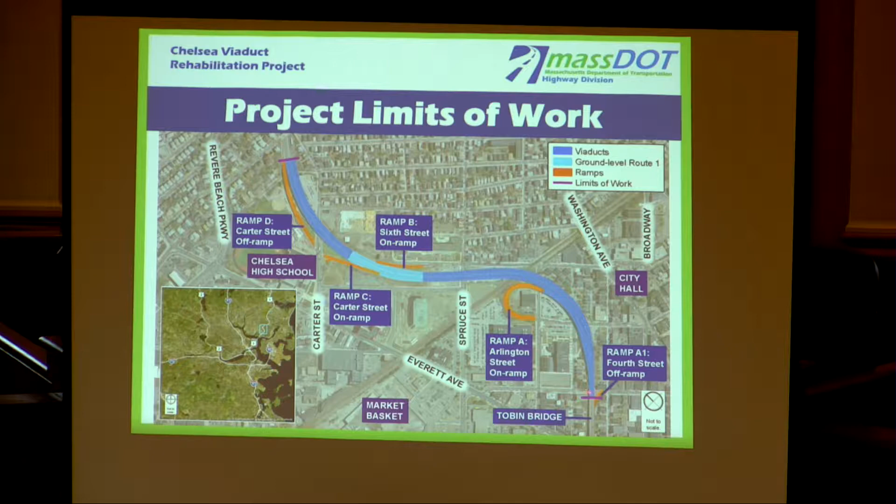Project limits of work include the entire structure, the Chelsea Viaduct, on Route 1. The northern limit of work is right north of Chelsea High School, and then continues southbound all the way to where the viaduct transitions over to the Tobin Bridge, right at this location. And just a bird's eye view to better orient yourself of the project area, including the ramps, Arlington Street on-ramp, Carter Street on-ramp, 6th Street on-ramp.

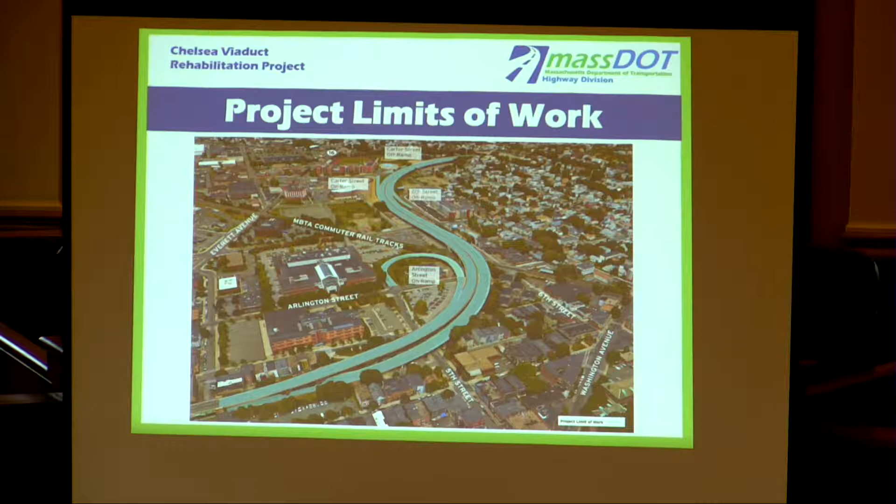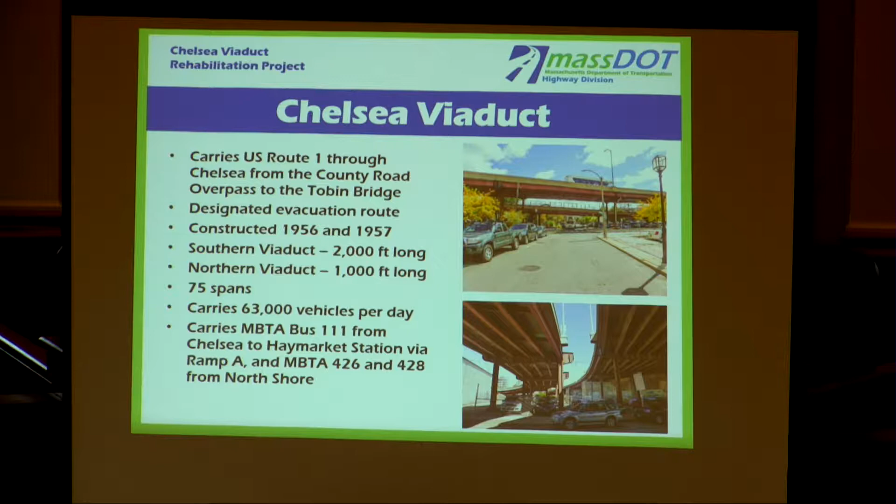So the Chelsea Viaduct, as most of you know, carries Route 1 through the city of Chelsea, carries about 63,000 vehicles a day. It was constructed in the late 1950s. It is a major regional component to the transportation system here, north of Boston, leading in and out of the city. It also carries a variety of transit routes, MBTA Bus Route 111 and a few other options, Bus Route 111 being the primary service from Chelsea into Boston for commuters, or for transit riders.

Existing conditions, for those of you who have been underneath the viaduct, you understand the deterioration that is occurring. The structure itself is structurally deficient. Both the deck and the structure are in poor to severe condition. I want to reiterate that this does not mean that it is not safe to drive on the viaduct. It is indeed safe. It's not going to fall down, but it is in pretty rough shape and is in need of some serious repairs.

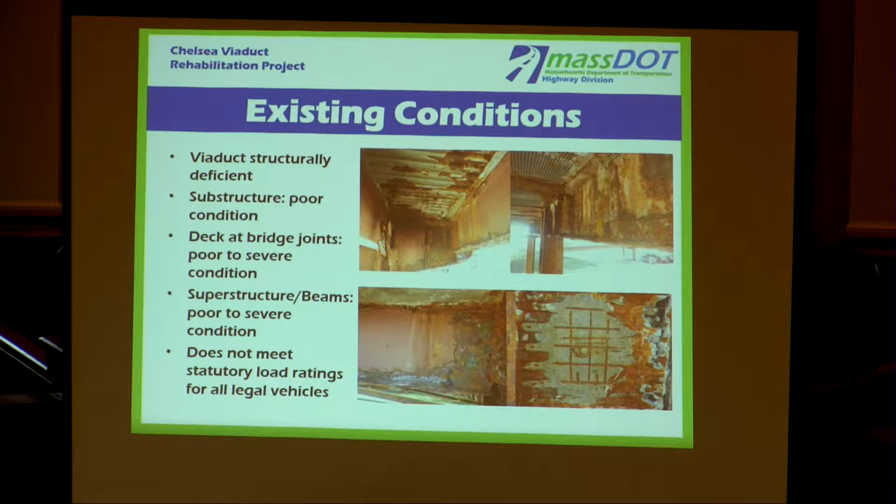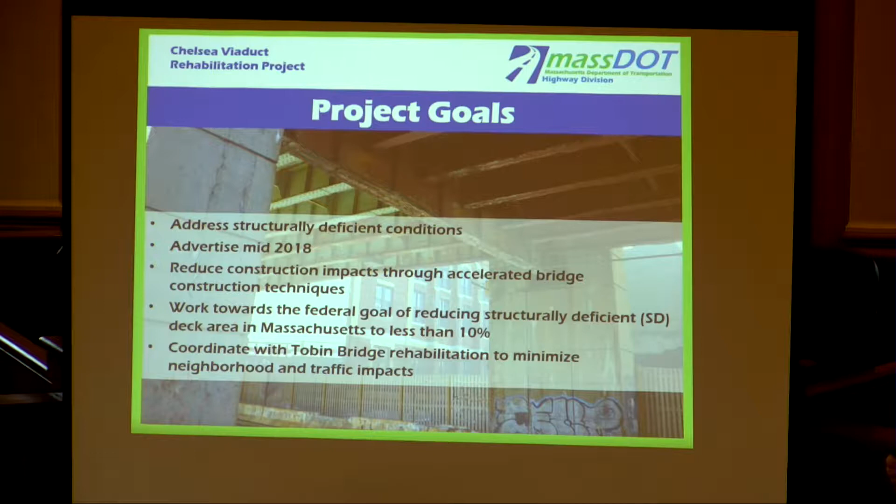So the goals of the project: number one, correcting those substandard conditions. We want to advertise the project in 2018 to align the construction of this project with the construction that's going to be happening on the rehabilitation project on the Tobin Bridge. And then another large goal of the project is to reduce impacts to abutters to the maximum extent possible. We understand that this is going to be quite the burden on the community, and we want to reduce and lessen those impacts to the most that we can.

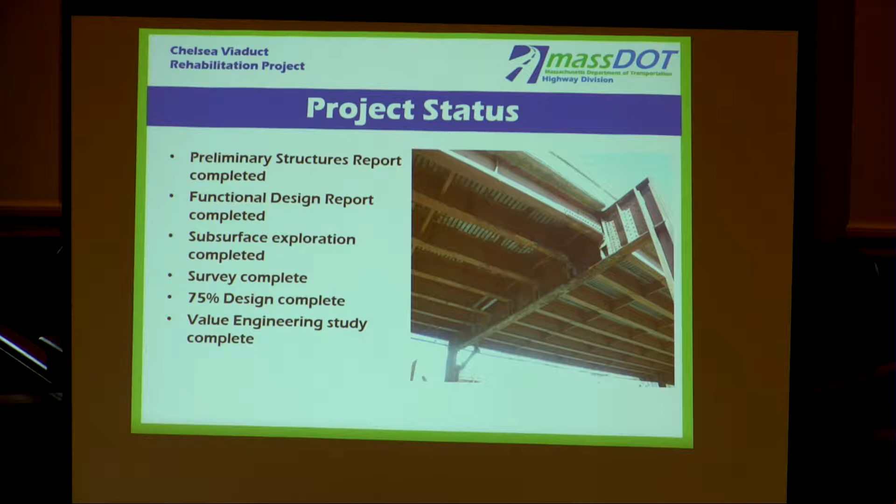Project status, this is where we are today. The important thing on this is that we are right now 75% design has been complete. In the coming months, we're going to be advancing towards final design. That by no means is saying that the project is not receptive to hearing the community concerns and that there isn't an opportunity for concerns to be incorporated into the design moving forward.

So again, at 75% design, which was completed just this month, final design is right now scheduled to be occurring or completed in May next month, with the goal of advertising the project in June.

The scope of work first and foremost includes rehabilitating and repairing the existing superstructure and substructure, utilizing prefabricated bridge units, or PBUs as we refer to them. PBUs are an accelerated bridge construction methodology - we'll get into more detail on that later. We also plan on installing crash barriers, a solid snow fence where possible, where it doesn't impede sight distance on the viaduct. We're going to replace roadway lighting, bridge drainage, and rehabilitate the existing parking lots beneath the structure.

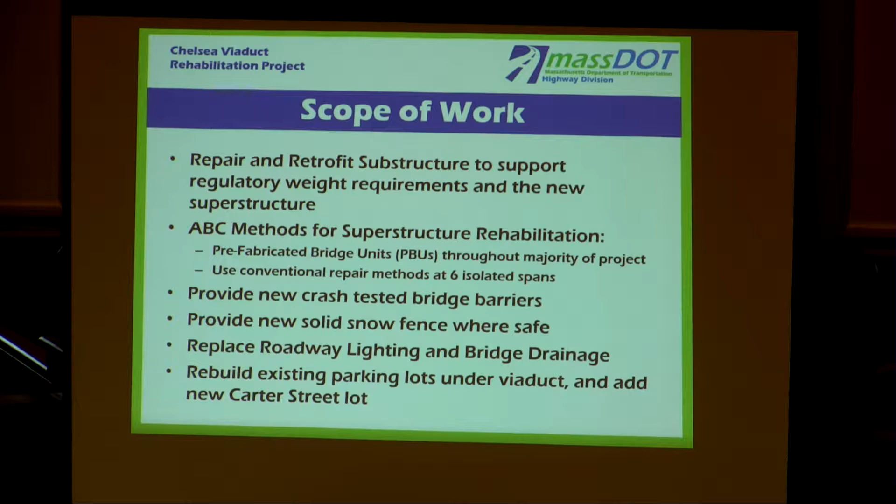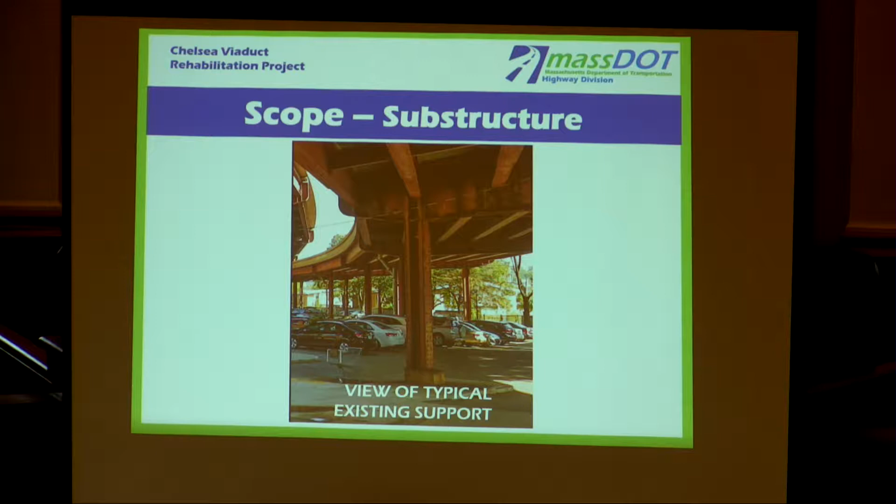So as part of the project, we have a series of options which we are engaging with the public to enhance beneath the structure, to try to give it a little bit more of a community feel to the maximum extent that you could do underneath a structure such as this.

So the design team have developed a few potential alternatives for what can be done to the supporting elements, the beams in place. If we go back and look at the picture I showed before, really not very nice to look at. We have a few options here: this standard column concrete encasement, or we're exploring other alternatives that could include the possibility of artist displays. This could be done on a rotation - we could work with the city, engage with the high school community groups to have a rotating art display beneath the viaduct.

Here's a few other options we're working with. These options are on display in a few locations, both here in City Hall as well as the library throughout the community, and we are seeking the input of the community to determine what's the most favorable of these options. This one right here, which would allow itself to be painted and repainted in an artist rotation, is the current leader. These are also on display downstairs. Then we have these two other options - you can see in this one, this offers an opportunity for an interchangeable art display that could be up there for a given amount of time and then switched out with other art displays.

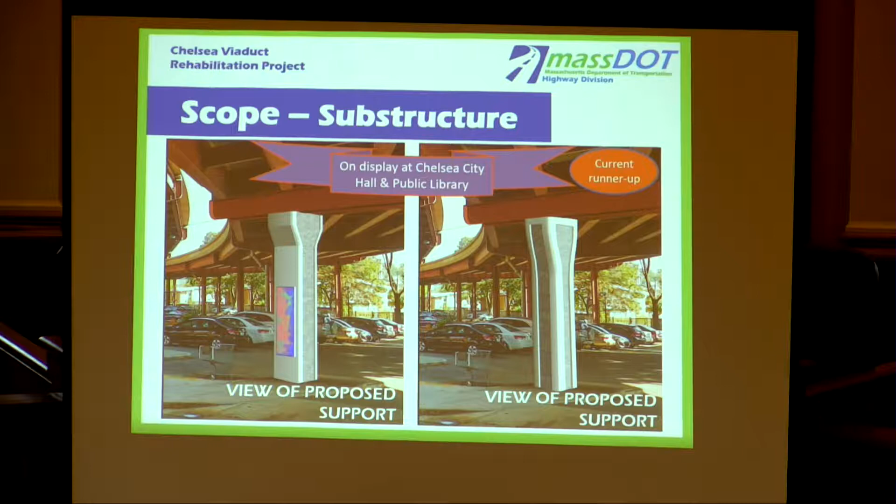The scope of the superstructure - again, the entire superstructure will be replaced. We intend to utilize these prefabricated bridge units, again an accelerated bridge construction method. These bridge units are produced off-site, then shipped in and laid down in a series, and the project would kind of caterpillar along. This allows for a shorter duration in one location and allows the project to be done in a much faster duration as opposed to a traditional construction method.

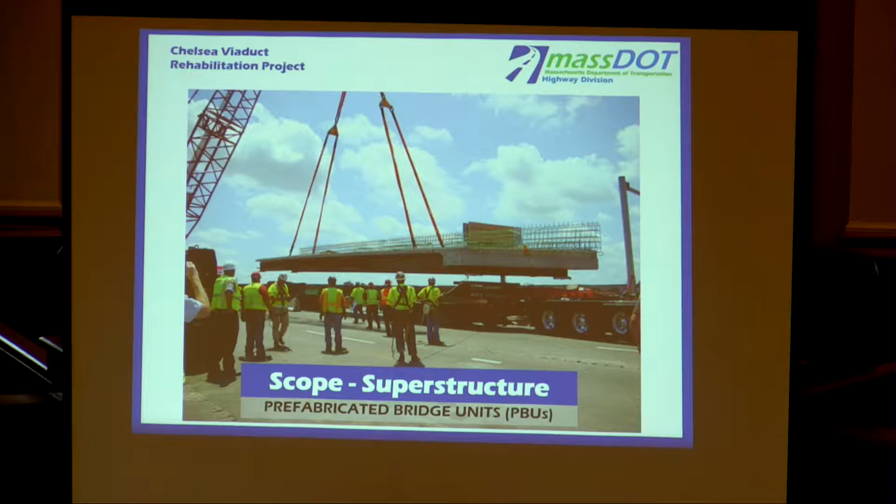This is a photo from one of the bridges that was done during MassDOT's Fast 14 project, which was acclaimed for its efficiency.

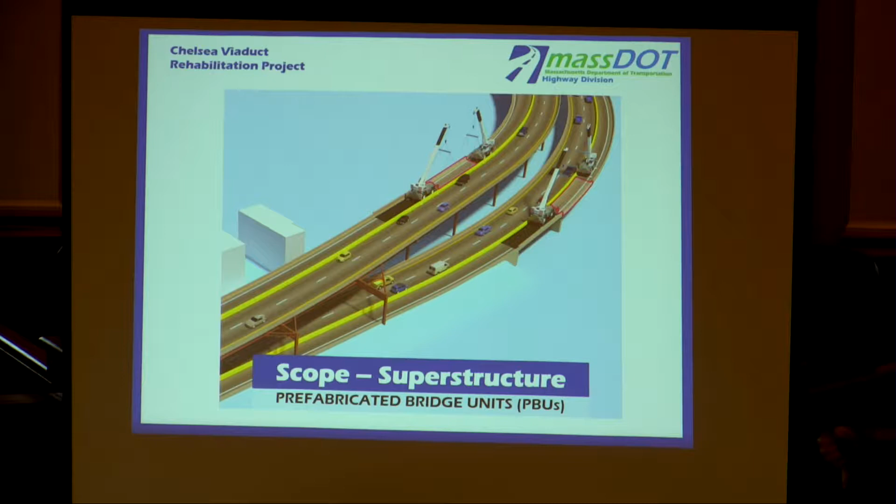There are spans within the viaduct where those PBUs cannot be utilized, due to varying constraints. The two locations where the PBUs, or the ABC accelerated bridge methods, will not be able to be utilized are right at the southern limit of the project, and then up where the viaduct crosses over the Silver Line or the commuter rail. At these locations it is going to be conventional repair, which will be longer in duration. We'll get into more about how we're going to schedule that to reduce the impacts to abutters.

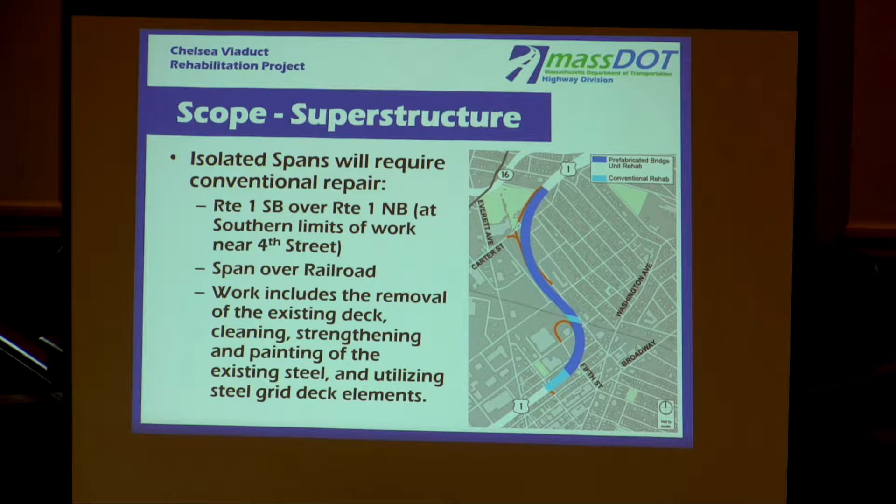The construction schedule: post-advertising in June of '18, notice to proceed will then be given to the contractor in the fall. Work on the substructure will begin in 2019, going out through the entire duration of 2019. The work on the superstructure, the PBUs I was just talking about, will begin in spring of 2020 and continue throughout 2020, with the final restoration on the viaduct being completed in 2021.

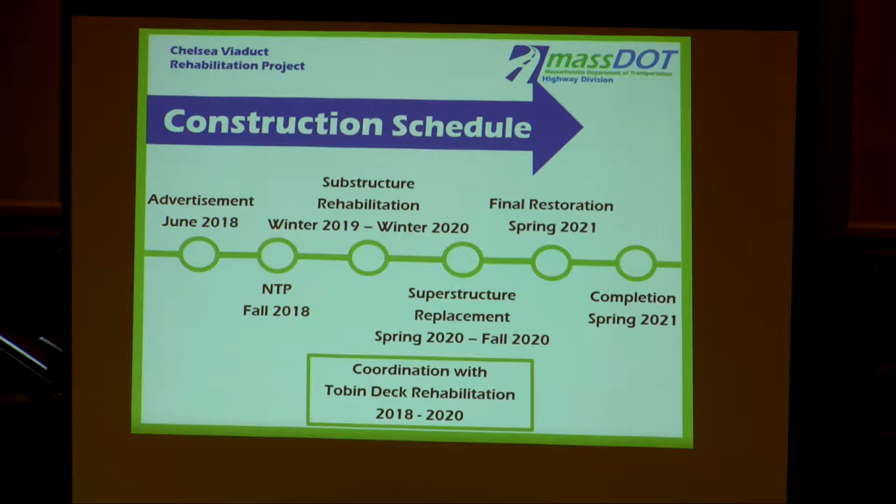During the impacts to traffic throughout the project, because it's split into two phases, the substructure work and the superstructure work, we've analyzed impacts to traffic based upon those phases. The substructure work will have no impacts to traffic on Route 1, and there will be no lane closures during that work. That's occurring in 2019.

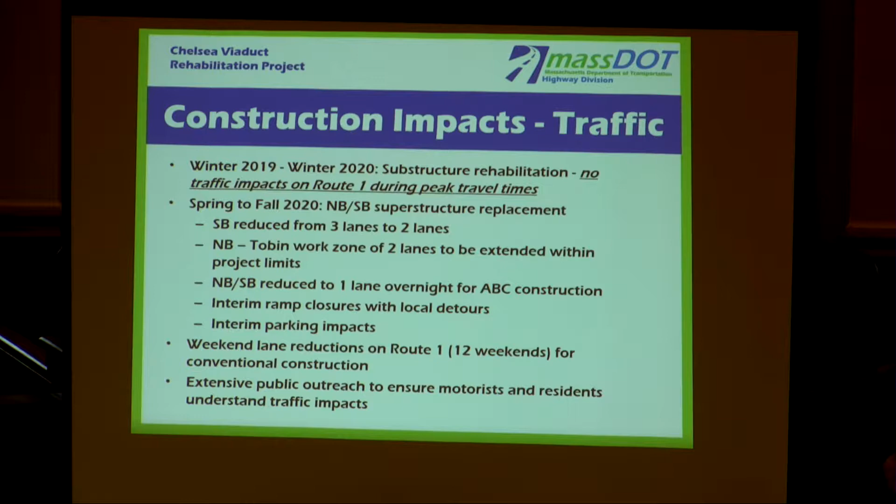We'll see the bulk, or really all, of the impacts to regional traffic resulting from the superstructure work. During that time, southbound Route 1 will be reduced from 3 lanes to 2, and northbound will also be reduced from 3 to 2, coinciding with the Tobin Bridge rehabilitation project. The Tobin Bridge rehab will also reduce northbound from 3 lanes to 2, aligning with the viaduct work so conditions match, creating a seamless transition from the Tobin Bridge project onto the viaduct project.

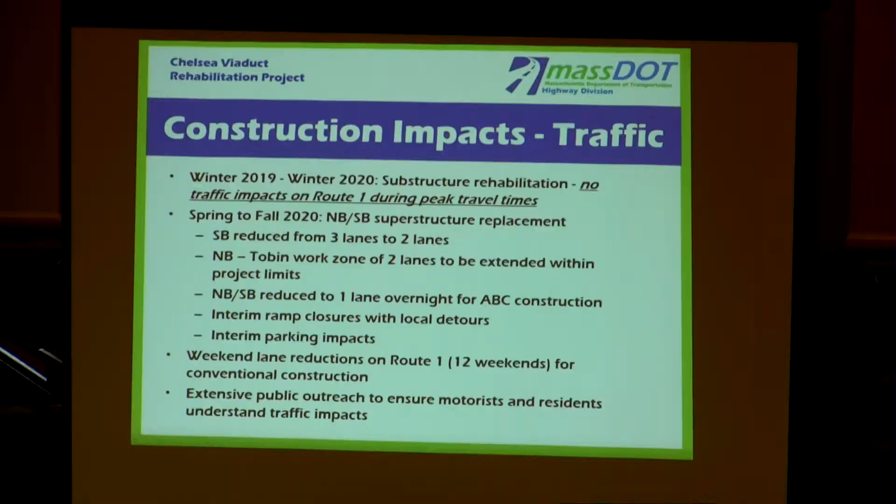To dive a bit deeper into what's happening at those spans where PBUs couldn't be used and traditional construction methods had to be applied, in order to limit impacts to abutters at these locations, MassDOT is proposing a 12-weekend significant lane reduction on the viaduct. During these 12 weekends, the viaduct Route 1 will be limited to 1 lane in each direction, and the contractor will be afforded 55-hour work windows from Friday until early Monday morning.

The intent is that the construction, which would have fairly substantial noise impacts with hours of operation going through the evening, would have that impact limited in duration. As opposed to if the 12-weekend shutdown wasn't used, the contractor would spend approximately 9 months at each location. So the idea is for regional traffic and the community to take the brunt of those impacts all at once, rather than drawn out over 9 months.

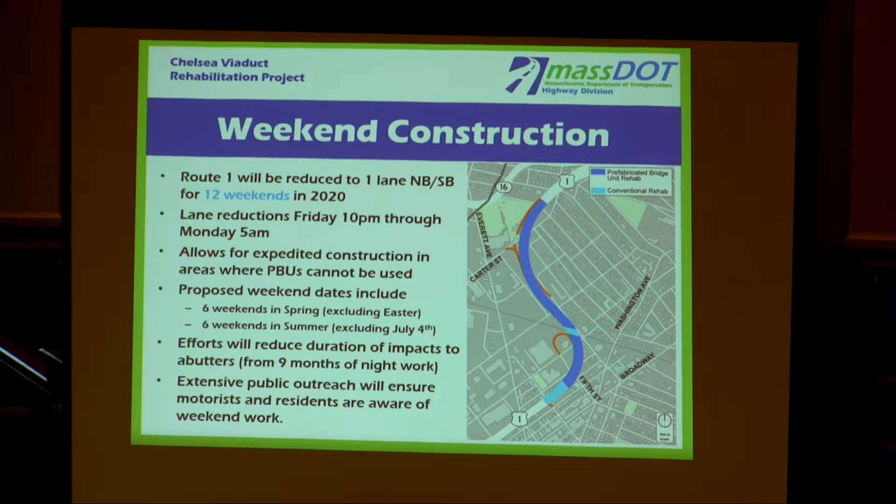For regional traffic mitigation, the contractor will be working with a public outreach specialist. There will be a robust program to make commuters, both regionally and locally, aware of the construction schedule and the plan, when people will be working and when lanes will be shut down. There will also be a police detail program in place. We've identified key locations, which I'll show on a map in a moment, where we feel details are going to be required to mitigate local traffic impacts.

There will be advanced warning signs letting commuters know when to expect impacts, both regionally and locally. Signals at intersections will be retimed and coordinated with one another.

The intent of the traffic mitigation plan is that it's not one and done. This plan isn't just put in place during the design phase, but throughout implementation—week 1, week 2, week 3—we'll be out in the community seeing what's happening locally. If a detail needs to be repositioned to help mitigate local impacts on local roads, that's an option available to us. To reiterate, we're not taking our eye off the ball; we'll continue to be here, take a first-hand account, and react appropriately to ensure the most is being done as that first wave of impacts is felt.

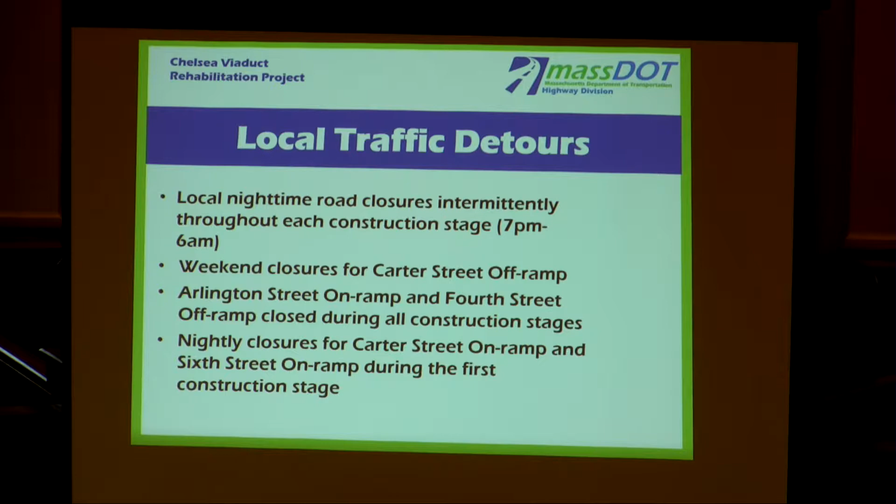So we anticipate impacts to the abutters. I've said this before in front of a few different groups. It's not possible to avoid all impacts to abutters. We're talking about a heavy construction operation. It will be loud, there will be dust. However, there will be mitigation plans created prior to construction in an effort to abate the impacts to the maximum extent.

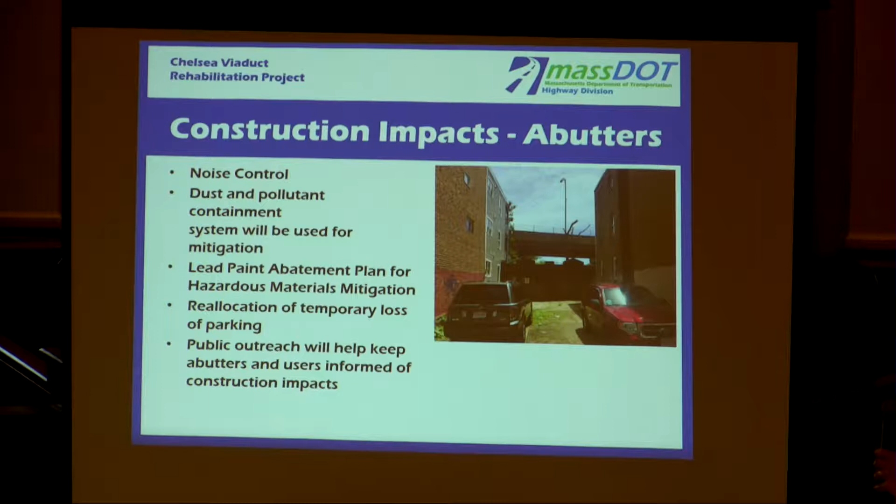So for noise, the viaduct, especially in a few key locations, is located approximately 35 to 40 feet from residences, very close, within a very close proximity. At a selected number of locations, MassDOT has gone out and measured ambient noise levels during normal periods of day, both during the day and at night.

The contractor will be required to work with an acoustical engineer to take those measurements and then develop a noise abatement plan. The contractor will be directed of allowable noise levels, and in the event that those noise levels are expected to be exceeded, they will have to put up temporary mitigation measures in place to ensure that residents do not experience the full brunt of those exceeded noise levels.

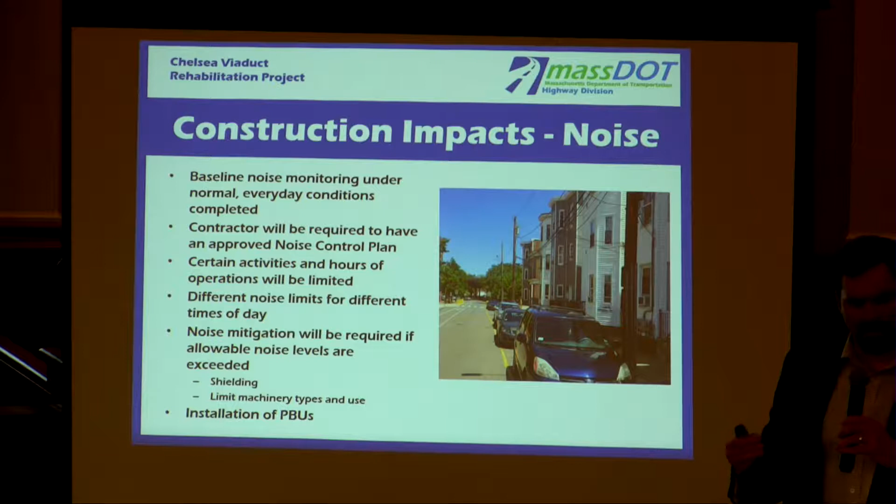That mitigation could look like temporary noise barriers. There can be noise reduction, noise lessening technologies and applications that can be put on construction equipment to keep those noise levels below the allowable amount.

There's going to be a loss of parking temporarily beneath the viaduct. The reason for that is that the contractor needs to access the substructure to get beneath. So there will be temporary parking loss. However, there will be the construction of a new parking lot adjacent to the high school on Carter Street, which will be accessible to whichever parking lot is being affected temporarily, and then whoever would be the users of that parking lot will be able to access that Carter Street parking lot.

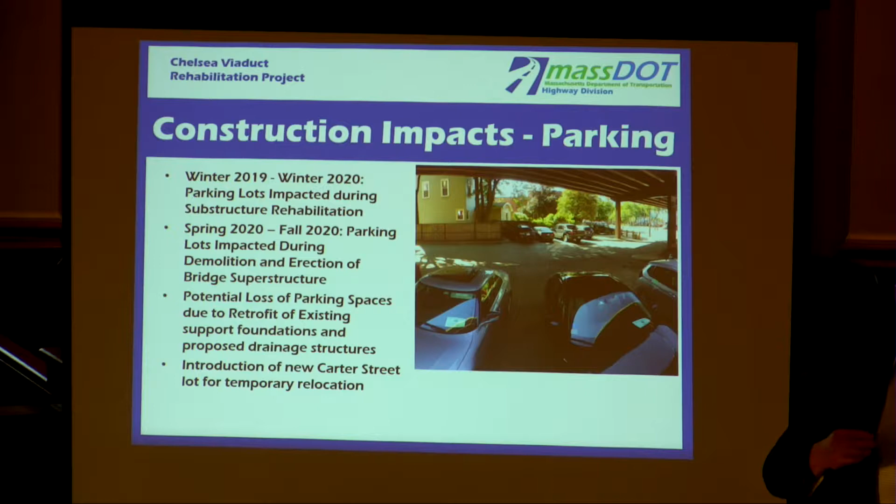There will be a strict lead and dust control plan put on the contractor. The contractor will be required to comply with national or federal, state, and local regulations regarding lead control. There will be a dust control plan in place. During construction and demolition operations, all activities will be required to be sprayed down with water to limit dust, and this will all be monitored by an environmental monitor on site.

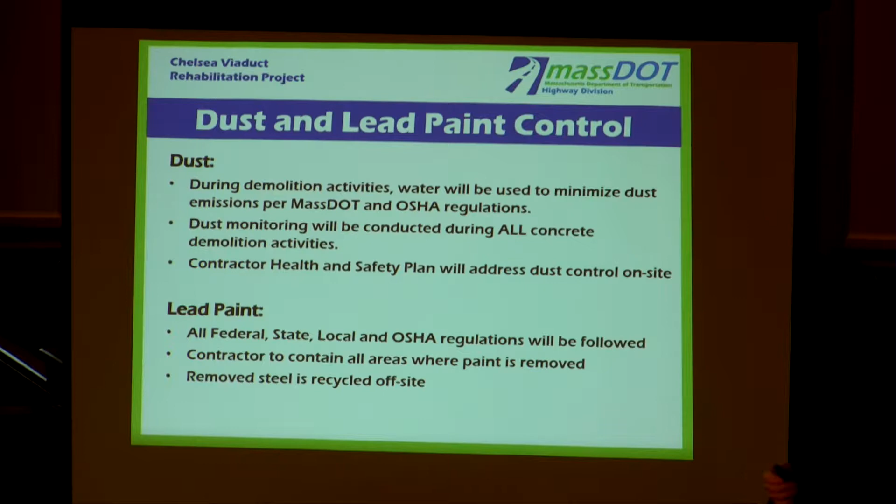And in the event that those allowable conditions are exceeded, the environmental monitor will be given the authority to halt the operation until the impacts are mitigated for before being allowed to continue.

This project is federally funded and does require review and approval under the National Environmental Policy Act. MassDOT is coordinating with the Federal Highway Administration throughout this process and will continue to engage throughout the environmental review.

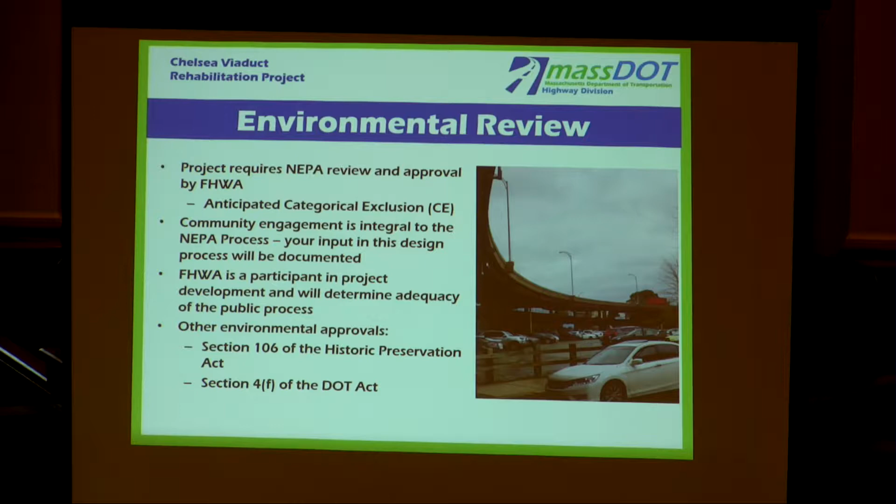The public participation plan has been in place for quite some time now. Many of you have seen us before. You'll continue to see us. We have taken a very serious approach to engaging with the community and trying to connect with all residents, all stakeholders, so there are no surprises, and again, to hear your concerns and incorporate them into the design where possible.

Before the design public hearing, some of the mitigation measures that MassDOT had already agreed to included providing an allowance for additional crossing guards near schools within the project area, architectural improvements to the supporting elements beneath the structure, weekend construction to lessen those impacts and shorten the duration so we could be in and out as quickly as possible, and improving the lighting underneath the structure.

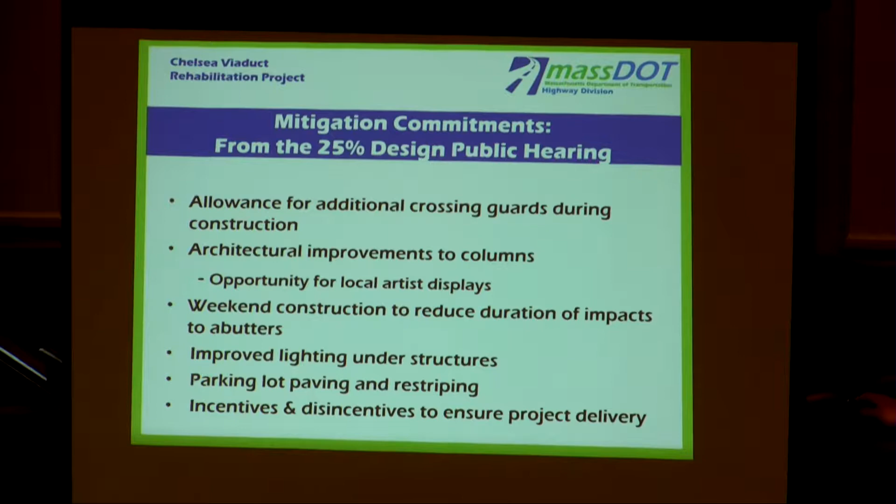All parking lots beneath the viaduct will be rehabilitated, resurfaced, and restriped, and there will be strict incentives and disincentives in the contract, which rewards the contractor financially if they are able to finish a given portion of the project ahead of schedule. If they exceed what has been scheduled, then they are disincentivized and need to pay a penalty. So these were all elements of the mitigation package that was in place prior to the last time we were here.

We heard overwhelmingly through the design public hearing, through our meetings with Chelsea GreenRoots, City Council, Chelsea Collaborative, one-on-ones, and the business community, that there was strong opposition to the closure of Ramp A, the 5th Street on-ramp. The project had originally included the demolition of this ramp due to a low number in traffic volumes.

Based on the feedback we heard, overwhelmingly, the decision was made to keep Ramp A in the project. This ramp will stay open. The ramp is going to be rehabilitated. There will be no shift in geometry, and the ramp will be closed during construction and will open after construction. The ramp will stay in place.

We also heard, last time we were here, quite strikingly, stories about the impact of snow removal along the viaduct and the damage that snow falling off of the viaduct does to abutting properties, broken windows. We took that very seriously, and tried to determine the most appropriate measures we could take to stop that from happening. The project always included the installation of a new snow barrier. The traditional snow barrier that MassDOT installs tends to be slotted, allowing material to get through. However, due to the proximity of these properties to the viaduct, any material getting through was having a direct impact on the residences.

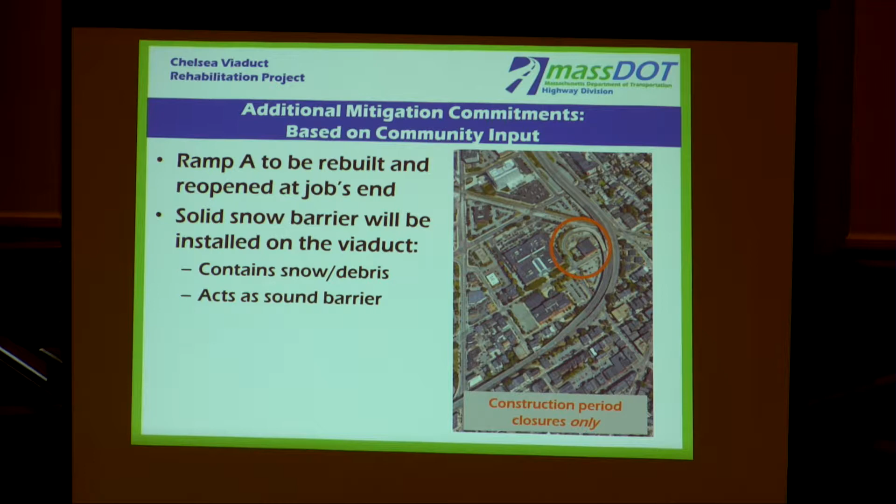We also heard a concern about the levels of noise as a result of traffic that direct abutters experience, during the day and at night. The project does not qualify as a Type 1 project, therefore it does not qualify for the installation of a sound barrier. However, the solid snow fence just so happens to provide nearly the identical amount of sound reduction that you would experience with the installation of a traditional noise fence along a highway. So the solid snow barrier, which we looked into after hearing what was happening to properties, coincidentally provides some of the same level of noise reduction. So it's a dual benefit, and we think this is positive.

Additionally, MassDOT, through coordination with the city manager, has agreed to providing an $800,000 mitigation fund to the city. This fund can be utilized in any way the city sees fit, so long as the money is spent to mitigate impacts directly resulting from the viaduct. There are numerous opportunities here: an aesthetic improvement program for abutters, ornamental light installation beneath the viaduct, or the city could hire an independent environmental monitor. There are a number of opportunities, but again, so long as the money mitigates the impacts of the viaduct.

We also heard a request during our previous outreach efforts that all property beneath the viaduct be returned to the city of Chelsea. Due to existing lease agreements that MassDOT has with other agencies, and due to the need to access beneath the structure to maintain it, handing all that land over to the city is not possible.